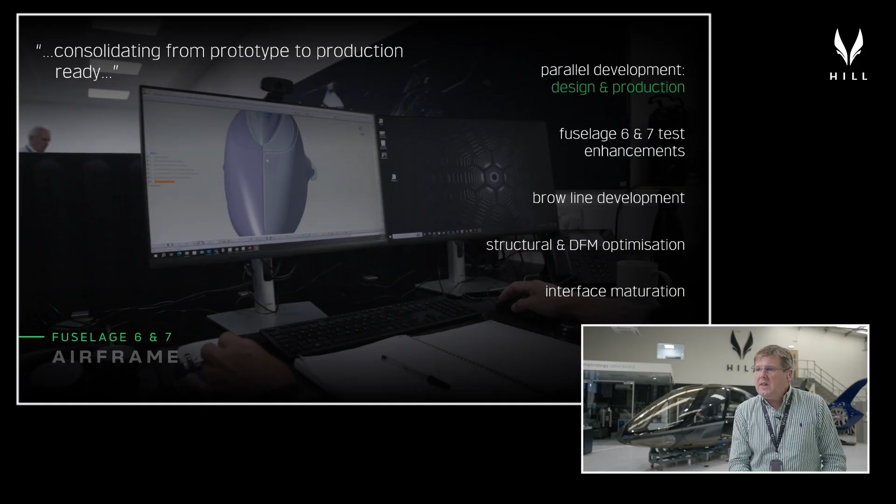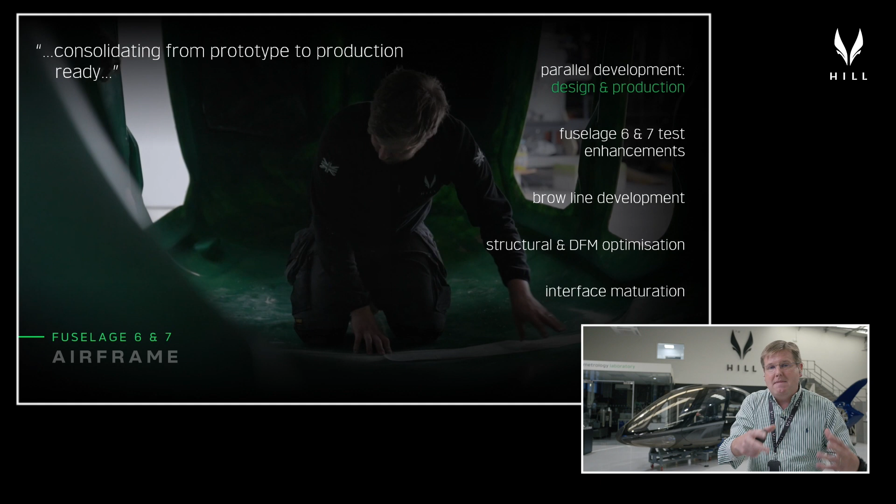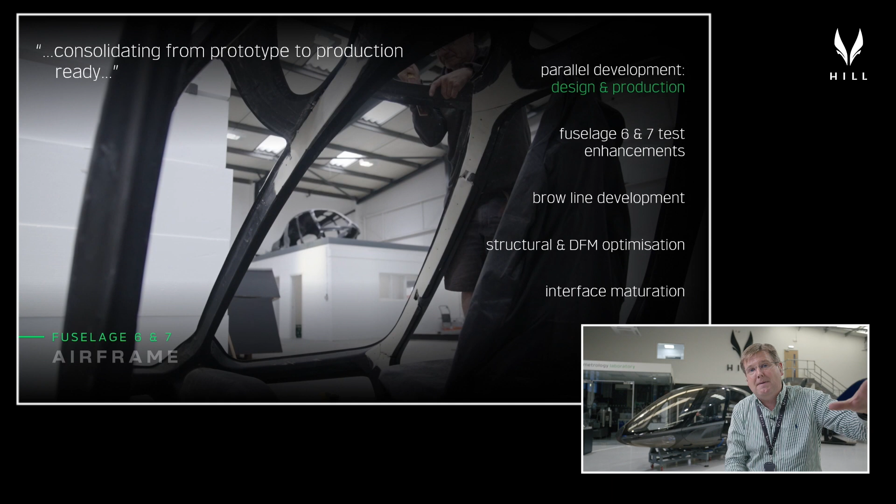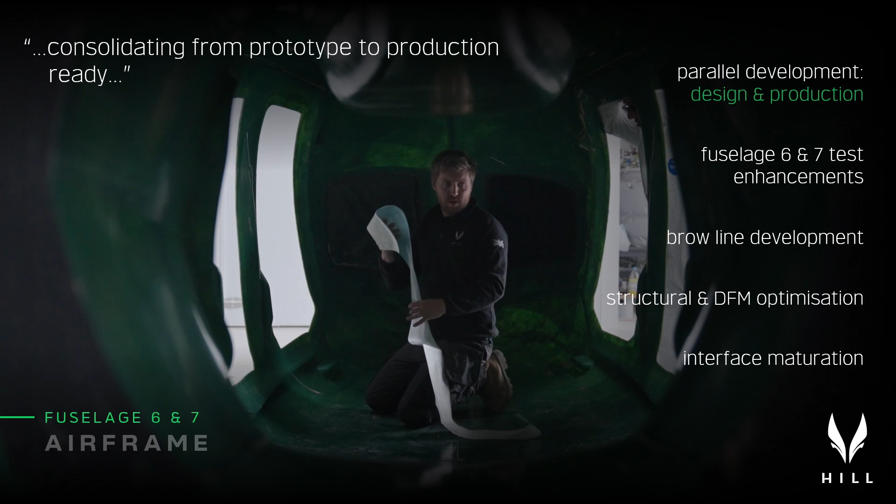Let's start with the development of the airframe. We're currently building Fuselage 6 and Fuselage 7. One of the benefits of our vertically integrated strategy is that we're developing in parallel all of the production methods and processes at the same time as we're developing the design and the aircraft itself. That means we get the opportunity to bake in a lot of the things that get fed back from production, fed back from tests that we carry out on early production specimens into the design before we freeze the production tooling. We're also able to test out a range of modified production processes for the fuselage that reduce the amount of labor, increase the amount of parallel activities that we can do as we produce these fuselages by working on open tools as long as we possibly can before we bring the whole thing together to produce the structural monocoque that you've all got used to seeing.

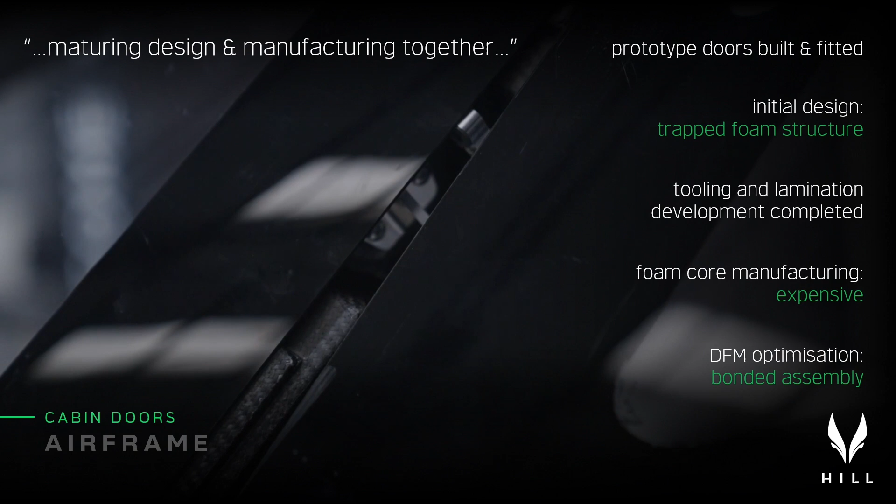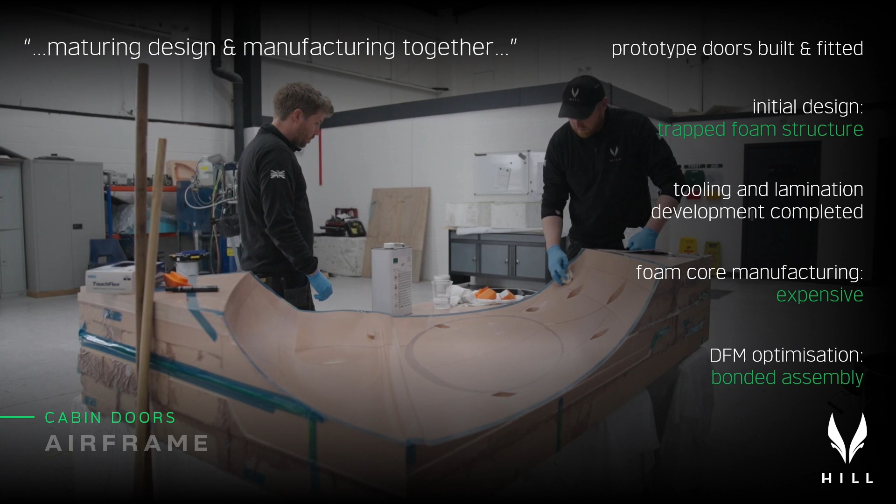Some of the other areas that we've been working on is the development of the general fit and finish. So we've done an awful lot of work on the cabin doors. All of the tooling approaches for the doors have now been tested. The laminating processes have been developed and tested. We looked extensively at different ways of manufacturing the foam cores before deciding that a better way of doing the doors would be to tool both sides and to do them in parts. All of that work has been going on over the course of the last month, and the guys are currently working on the final production scheme for the doors.

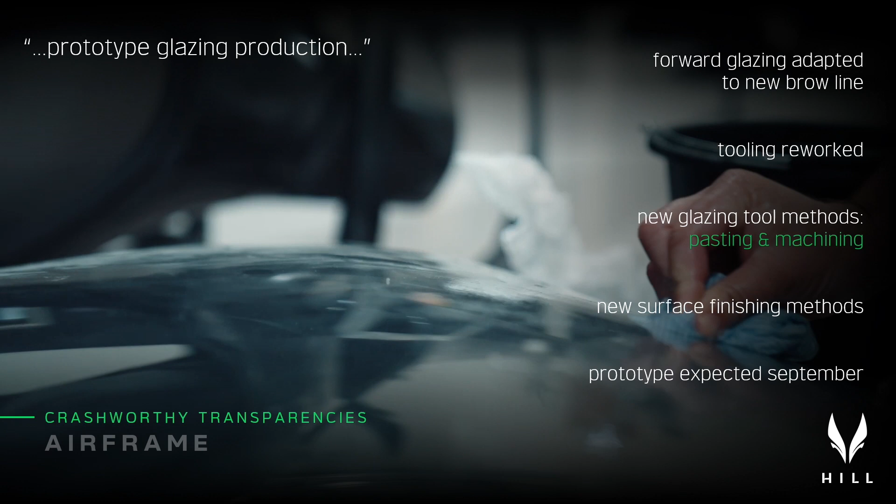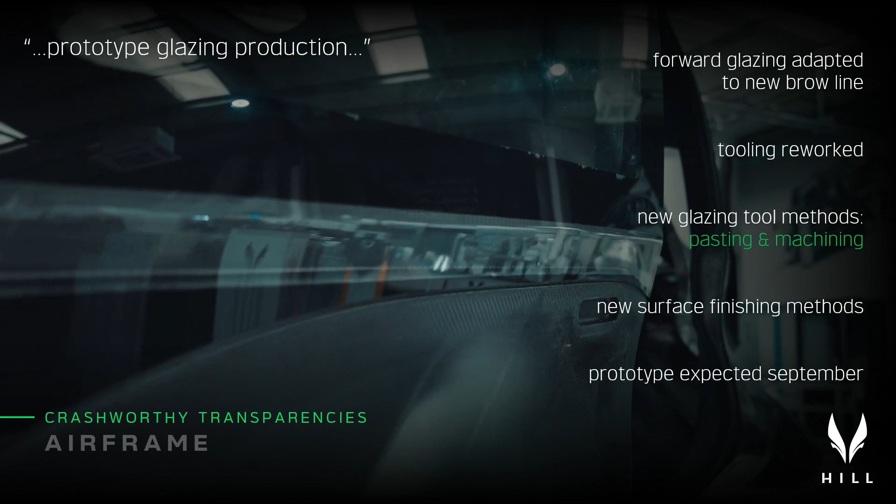So I mentioned last month how the guys had been developing improved tooling strategies to produce optically perfect glazing in-house, both in acrylic and in polycarbonate, for the impact resistant windows on the front of the aircraft. We're currently reworking those tools to accept the new brow line and to upgrade the surface finish across the full suite of glazing panels that we've got on the aircraft. All of those things have been going on during the course of the month.

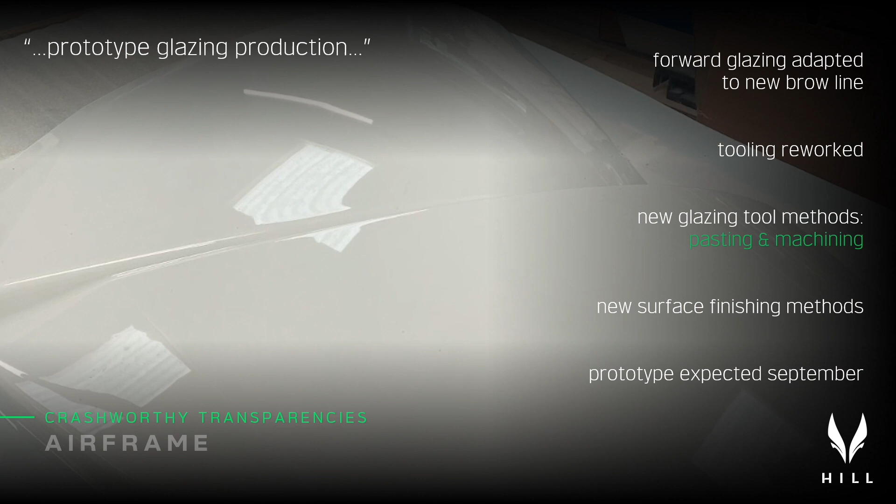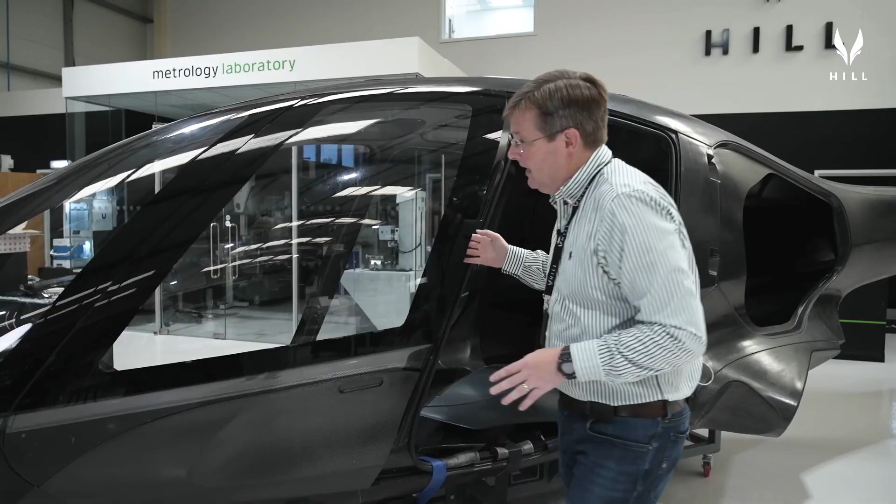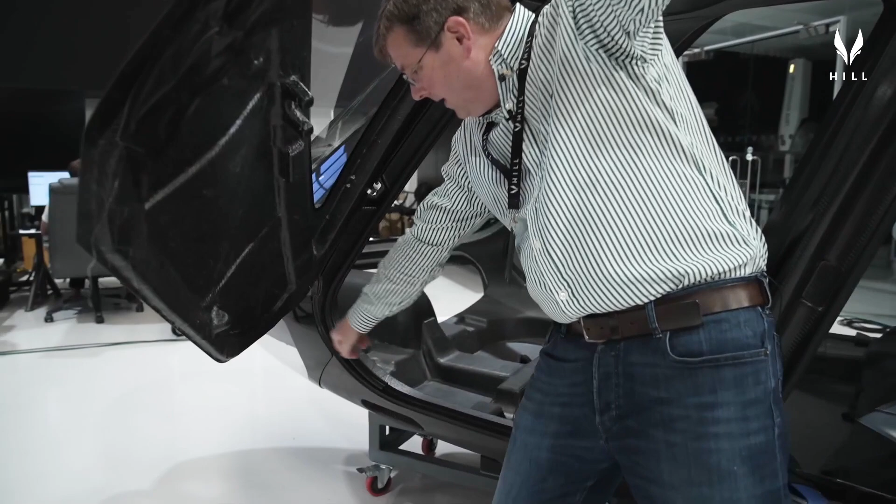When we first got to put the first few glazed panels on, the first couple of doors on, the physical property that we've got here on the shop floor really started to take shape. We've kind of got used to looking at it here on the shop floor now, but I think you'll appreciate when you look at it, everything that we said we would deliver in terms of the images that we've provided, the look and feel and quality of the product is being delivered, even on these crude early production demonstrator prototypes that we're producing here. The door itself opens slightly upwards because of the angle of the A-pillar, and so we have a gas spring installed from the root of the A-pillar up to the base of the door, well out of the way of foot swing.

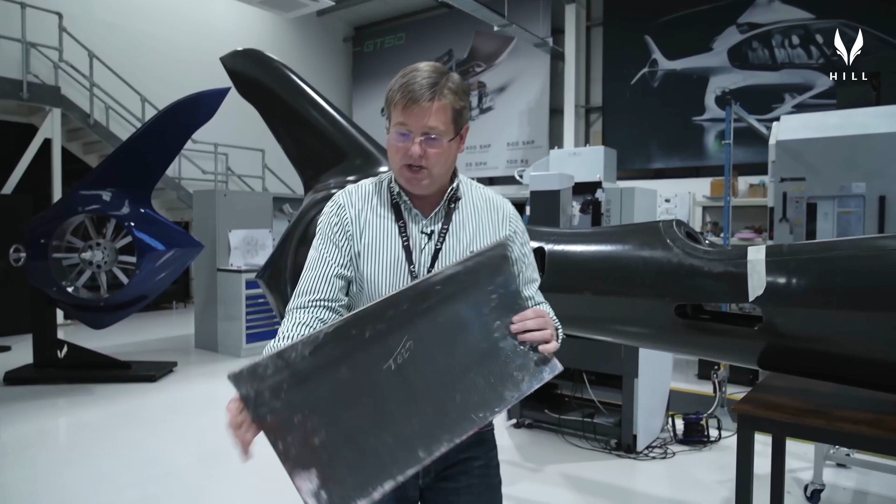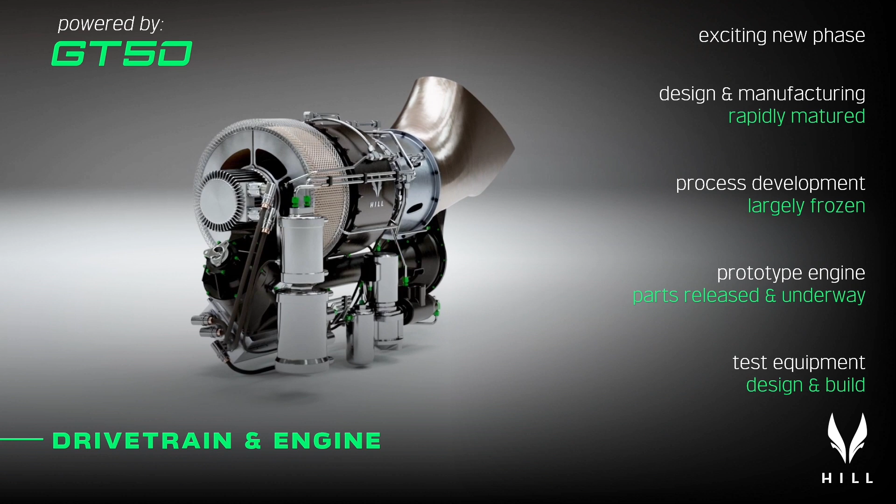So let's talk about the GT50 engine. We've very much entered an exciting new phase with the GT50 over the course of the last month. We're now in a position where the actual parts that are being produced for the actual test engine are underway, and every few days or so there's another trickle of parts from downstairs down to Mark, and the guys are in a massive push now to get the gas generator for the engine built. They've been on with the engine drivetrain for some time now, and that's all coming together really nicely.

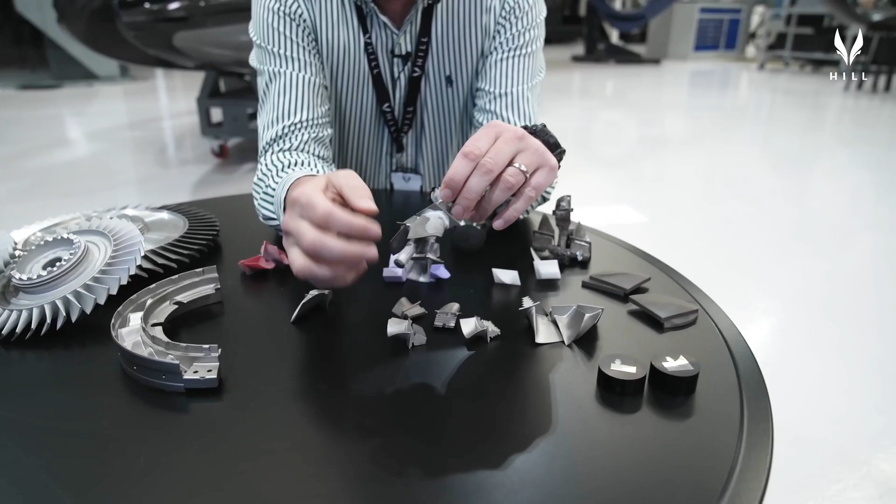One of the areas that has been a particular success over the course of the last month has been the development of our turbine blade casting processes. Great surface quality - we're burning the stuff out of the investment really nicely, and as soon as we've finished the update for you guys tonight, these things are going off to be chopped up, put under an electron microscope, have all the chemical analysis done on them, have them x-rayed, to make sure they're void and defect free. Once we know that's the case, we'll be purchasing this equipment so we can do these in-house, and we'll also be producing the full batch of turbine blades to be able to produce the test turbine rotors.

That's coming together really, really nicely. And as soon as we get the results back for these turbine blades, we'll be able to make the full batch of blades for the test engine. So really excited with that.

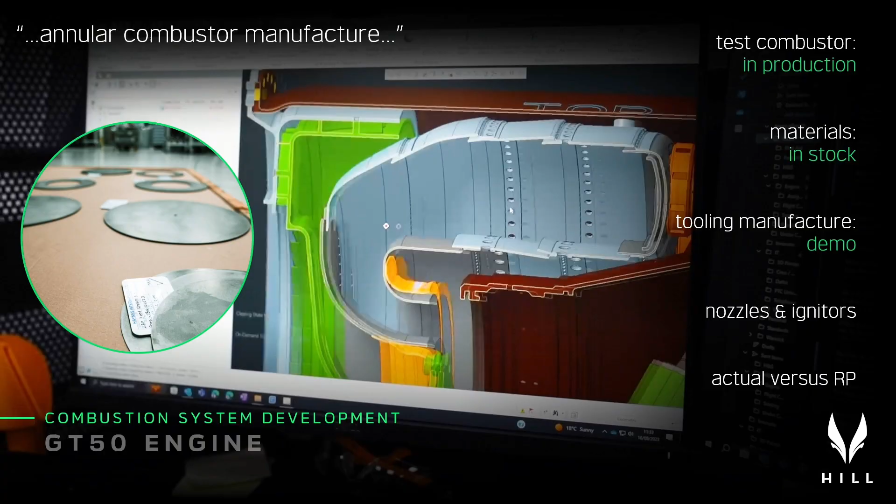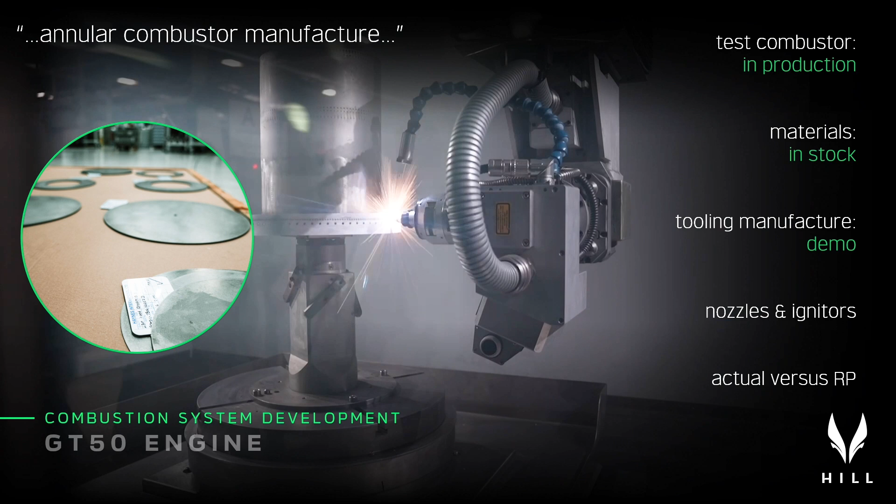In addition to the compressor, the turbine disc, and the turbine blades, I made you aware over the last couple of months that we've also released the combustor, and we've got the test combustor in production at the moment. All of the materials for the remaining parts of the combustor fabrication arrived last week, and they've subsequently gone out to a supplier doing some of the prototype pressing and spinning operations for us, so we can get the whole thing done a bit faster. All of those materials are in stock.

One of the things we'll be doing on the prototype combustor, to avoid waiting for a very expensive production machine, is drilling the 2,500 precision holes in the combustor needed to mix the air and fuel directly on the 5-axis. Just before he went on holiday, Mark did some trials on the super alloy material we use to produce the combustor, to demonstrate that we can drill these holes in a reasonable timescale using conventional methods rather than needing laser drilling. So we've proven that out.

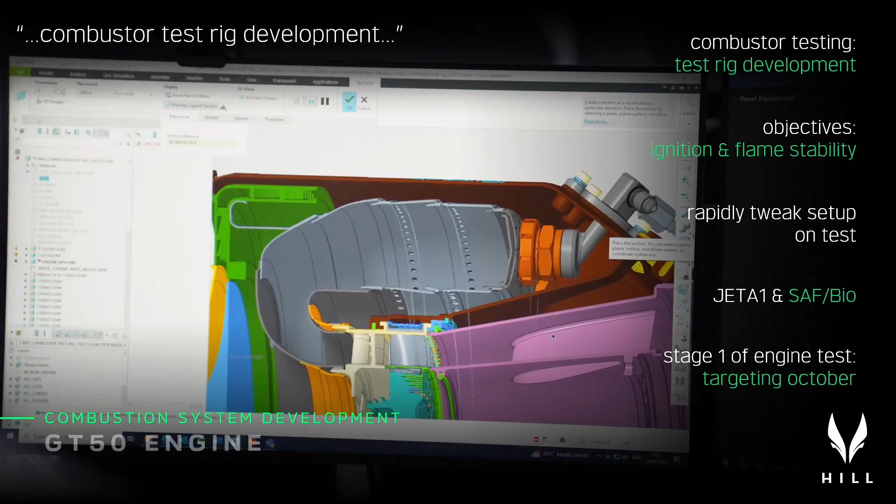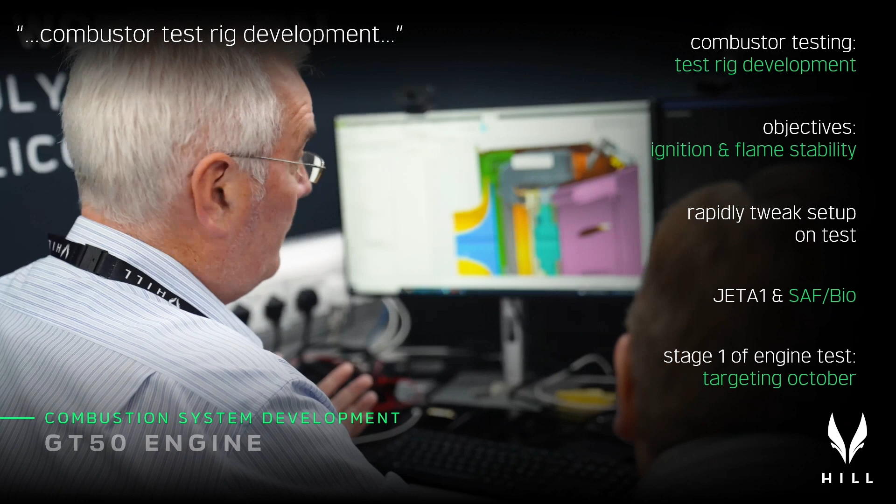As soon as those things are rolled, we can assemble it and produce the first combustor. With that coming together, we obviously have to put the facilities together to test it. The two first tests we want to do on the GT50 engine: the first is the starter generator unit, which involves both the power electronics side and the mechanical side. I'll talk about that later.

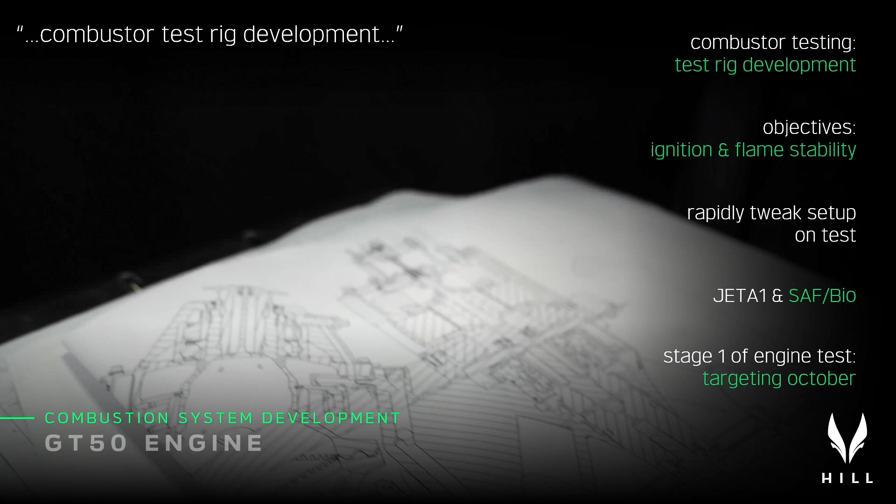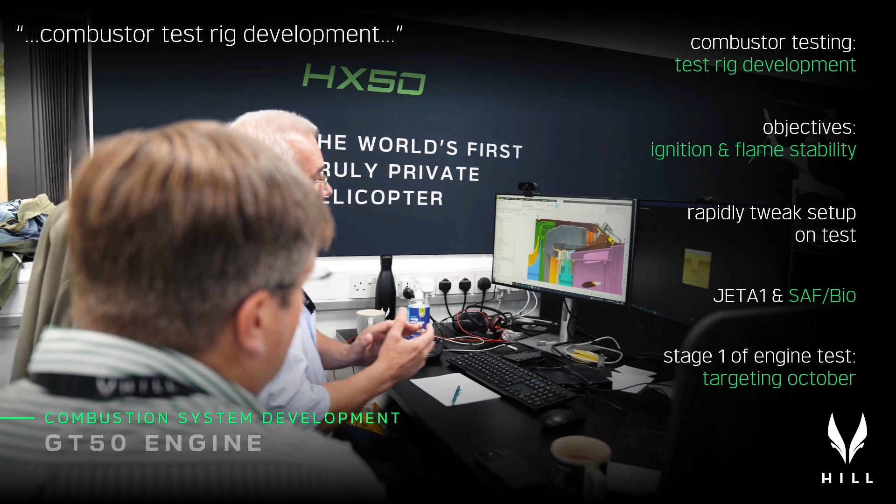The next test is the first part of the gas generator, the combustor, making sure we can get it to ignite and maintain stable combustion before we put it into the engine, because dismantling and reassembling a whole turbine engine to tweak combustor parameters isn't a terribly efficient way of working. So what you can see on the slide is a simplified combustion test rig.

That rig is just finishing being designed at the moment, and as the boys return from holiday over the next week or two, we'll be putting that through the production facility here at DC1 to get it built at the same time as the combustor.

Providing all of these things stick to the schedule we're working to, we're targeting a first run of the combustion system for GT50 in October, rapidly followed by the full gas generator unit. Really pleased with the progress made by the engine team and how that's all coming together.

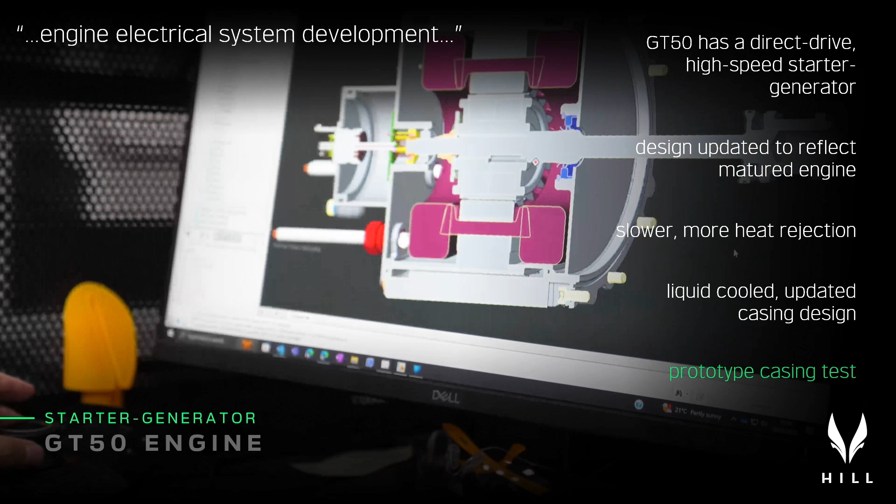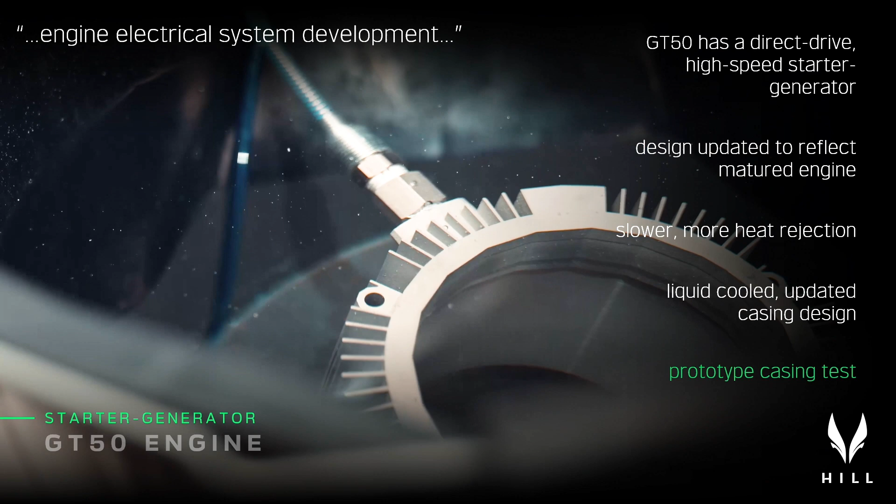The guys have been developing the starter generator, which includes both the mechanical hardware and the power management unit, as well as all the control algorithms, studiously as the engine has matured. One of the things we've been doing over the last month is tuning the design of the starter generator to produce its power at slightly lower speeds, meaning slightly lower voltages and slightly higher currents, adapting that to how the engine wants to run now that we've got the full detail of the engine available to us.

Now, the clever bits of a gas turbine engine, the compressor, the turbine blades, the fancy castings and that sort of thing, are only one part of it. What you've got to remember is our real task here is that we're developing an engineered product, something that has to be made, and made to a price to make general aviation healthy again.

So we're now in a position where we're producing the first 3 drivetrains, and the final of those will be the test drivetrain and the first flight drivetrain. And we've also now produced the very first demonstrator sprag clutch as well.

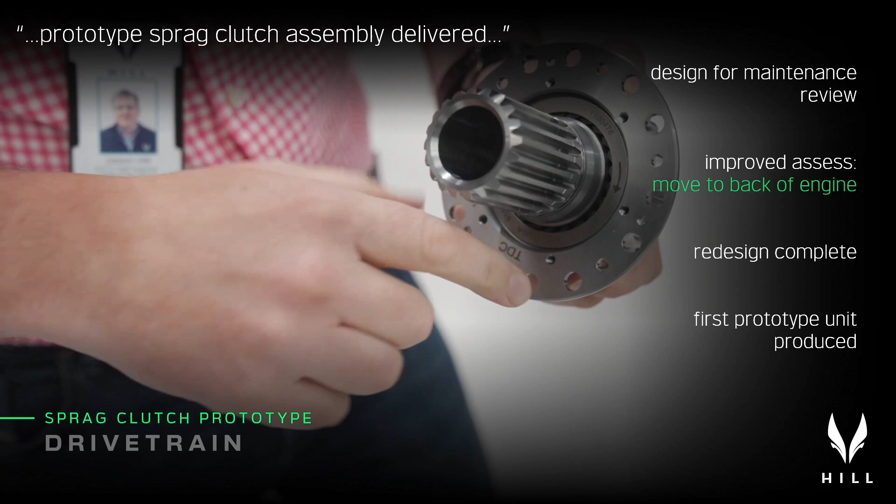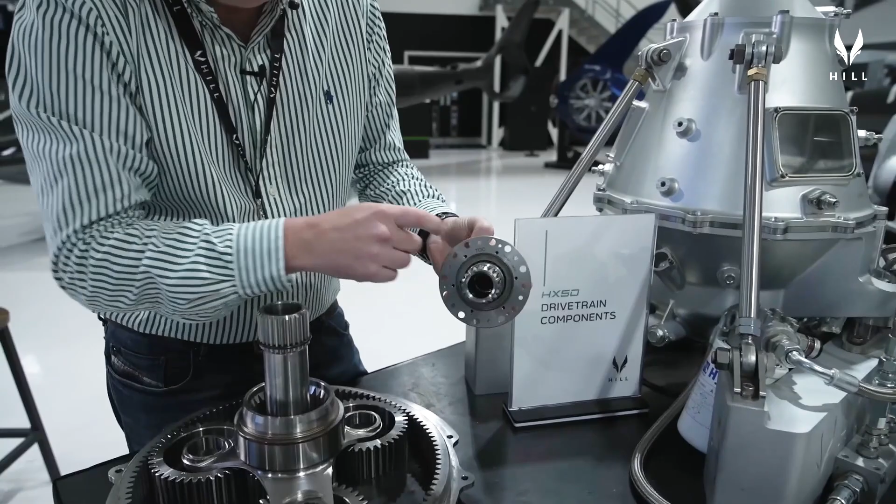So the housing, all of the interfaces that go into the drivetrain, ready for the machines for the end of the year. This is the outer housing that plugs into our gearbox. Sorry, this is the drive shaft that plugs into the gearbox, and this is the output housing here. As you can see, the shaft is free to run in one direction and lock solid in the other.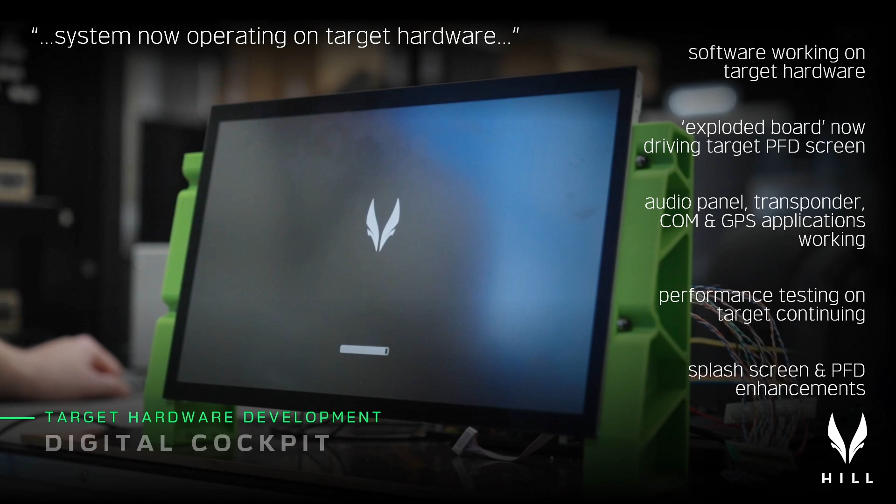The next area I'll update you on is the Digital Cockpit. As I mentioned previously, we've now got the system operating on target hardware. Since then, we've managed to get the target hardware driving the target screen via the correct communications protocol.

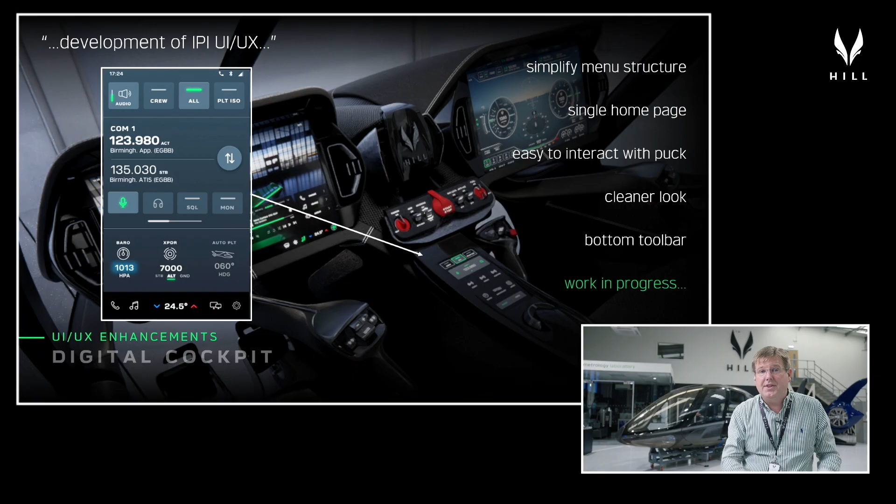So one new area of the UI development that's received a lot of attention over the course of this month. The original concept for this looked quite nice, but the menu structure was a little bit clunky. So one of the things the guys have been investigating over the course of the last month is whether they can reduce all of that down to a simplified menu structure with a single home screen.

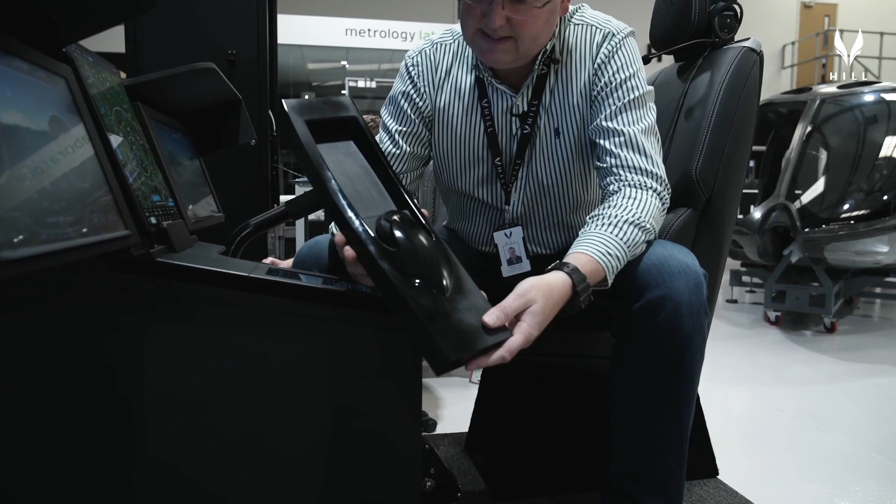And one of the things we've been prototyping over the course of the last week is one of the trim options and the first of the surfaces that we're going to integrate the puck into the cockpit with.

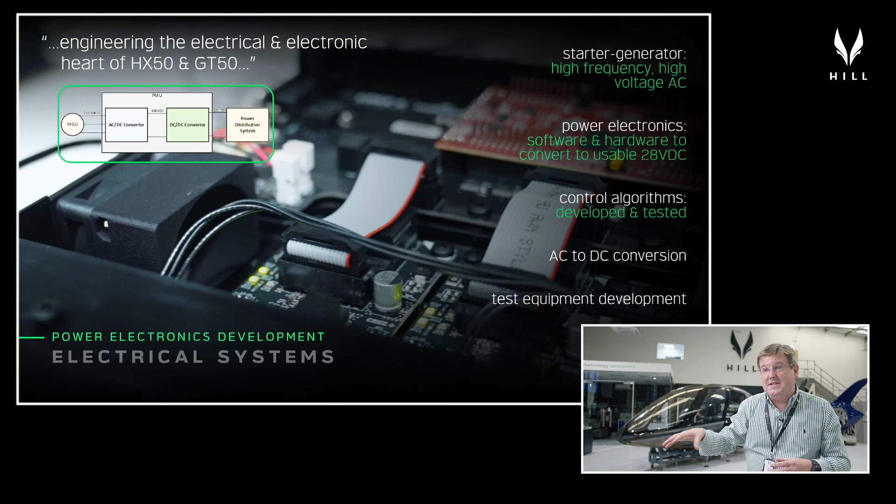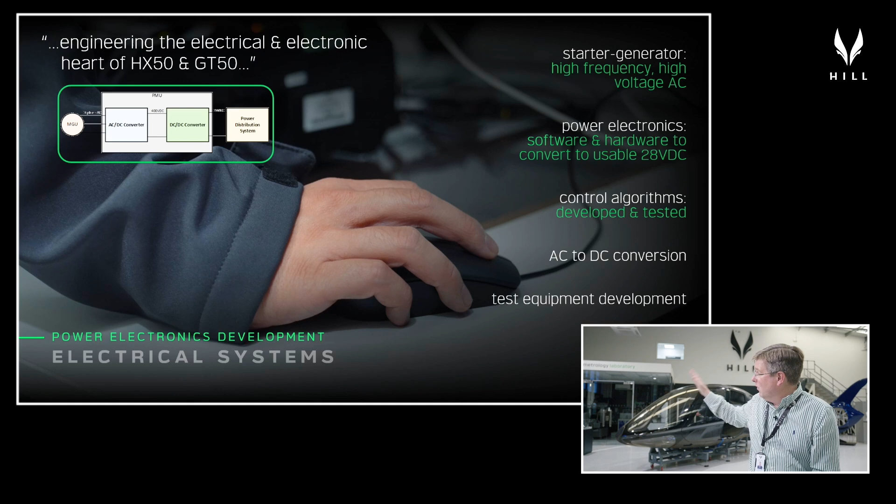So what we've got to do is develop the power electronics to convert the electricity as it's generated by this compact, lightweight, efficient electrical machine into stuff that we can use on the aircraft. To do that, we need a suite of power electronics. And to do all of that, not only have we had to develop all of the equipment to do it, we've also had to develop the test facilities to be able to test the components as we produce them.

I know you're all very used to me talking about composites and gears and engines and aerodynamics and that sort of stuff. The truth is that without all of the software and without all of the electronic and electrical components, HX50 would just be an ornament. Although this stuff is not natural stomping ground for aeronautical engineers, it's really, really important to what we're doing.

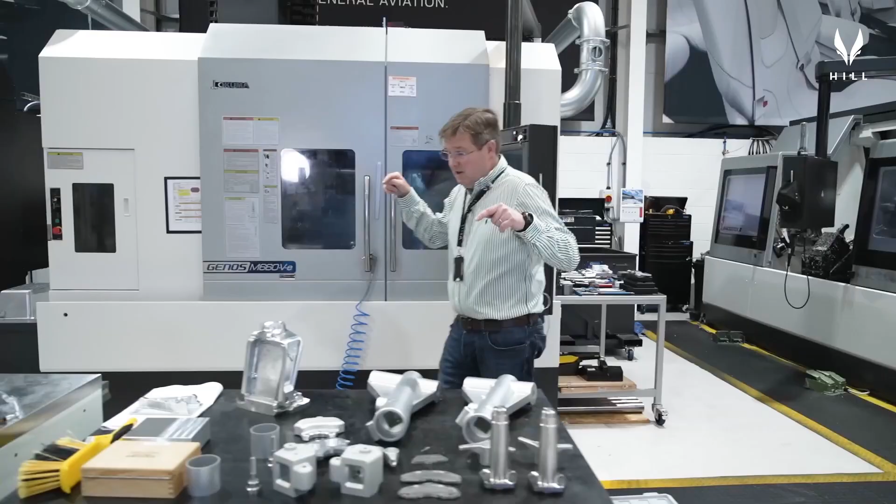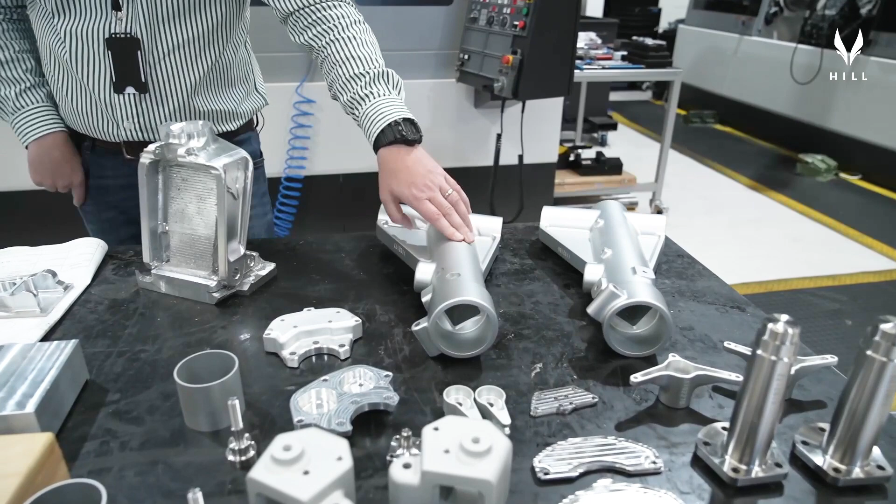We're now starting to amass quite a significant number of components for the wheeled undercarriage system. So we've got some of the mounting components, we've got the brake calipers, we've got the upper parts of the main undercarriage oleos, we've got the fork here for the nose wheel, we've got some stub axles over there. We've got plenty of anti-rotation links and scissor links and things lying around now as well. So all of these things are coming together really nicely.

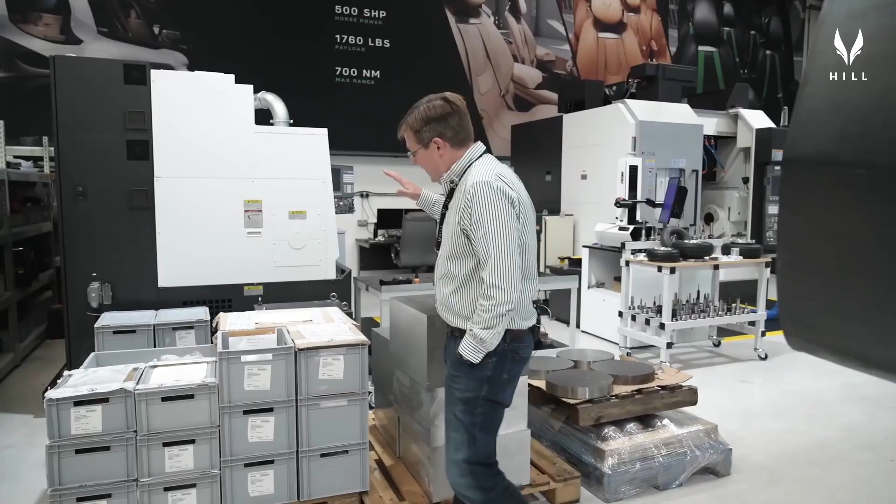This is a batch of gears for the first 3 engine drivetrains and some of the components of the main rotor gearbox that have just come back from some of the inspection processes that are required as part of our 30-step process for manufacturing gears.

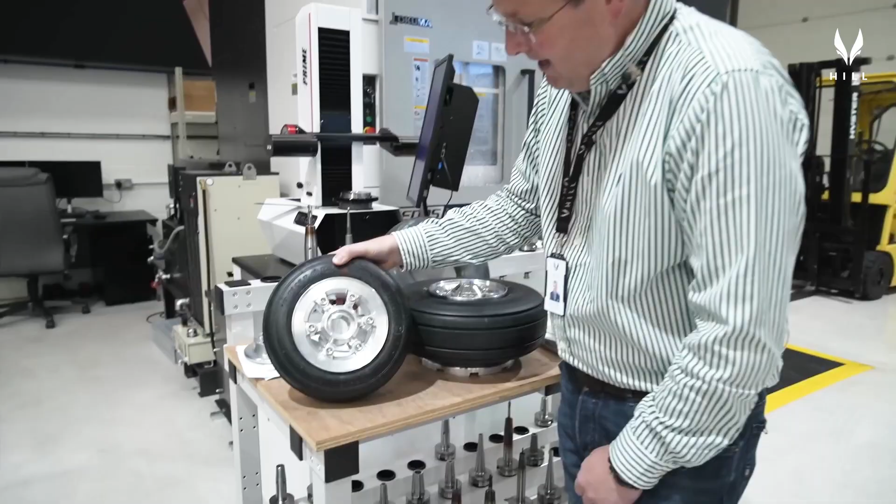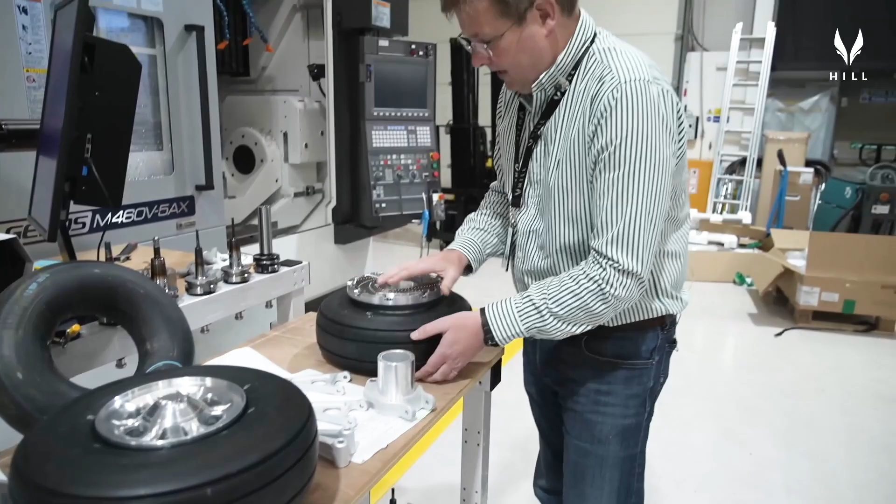There's the first nose wheel. Here's the first main wheel with a nice bit of hill bling in the center of it. And then with these main wheels, as you can imagine, on the back of them, we have to have a floating integrated brake disc as well. So the brake disc lives in there, caliper is retained in there.

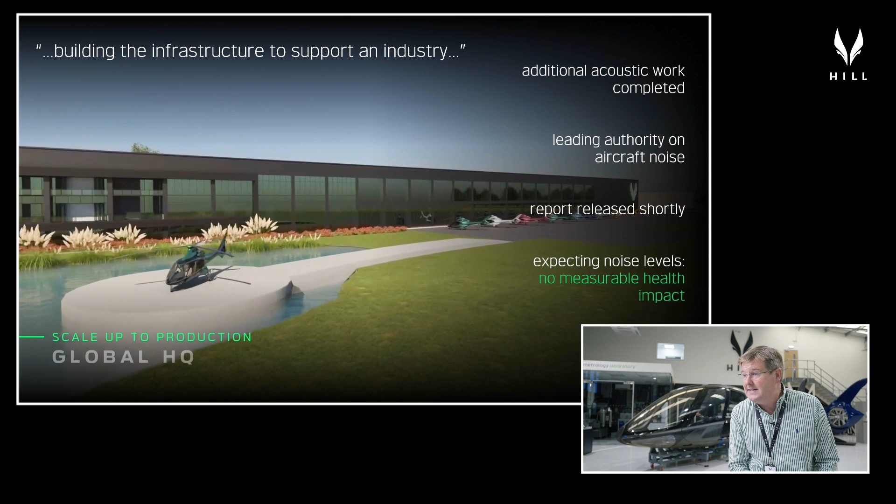Okay, a quick update then in terms of the factory. As I reported last month, we'd been asked to do some additional noise assessments for the Cresswell site. This work has now been completed. As I think I mentioned last month, we've been using one of the UK's leading authorities on aircraft noise, a guy that looks after a lot of the big airports in the country.

We've optimized our flight corridors, we've optimized our aircraft movements, and we're expecting the noise levels from that work to show that all of the impact is now below the level for which there's any measurable impact on human health. So we've put ourselves in the best possible position to get this planning permission awarded. Pleased with the progress on that front.

And then in other news, it's been another strong month in terms of sales. We currently stand at 902 aircraft sales with 733 X's, 169 C's, and I think it's 62 countries. Ruben and Misha will update me when we talk in a moment. But sales remain to be extremely strong, and of course, every week when we demonstrate further progress and more major steps in the program, it brings more people in. So there's never been a better time to come and join what we're doing here.